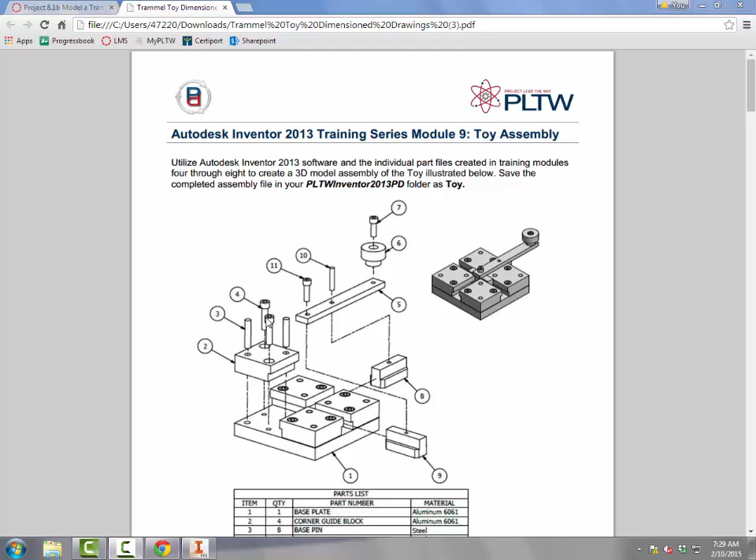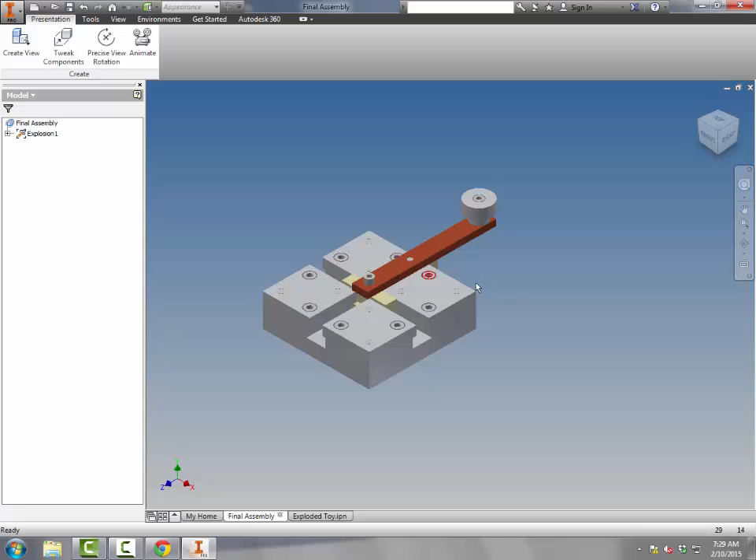In Inventor, I'm going to open a new IPN file, a presentation file. I'm going to click Create View and then select my final assembly. Again, we're doing manual explosions rather than automatic, and we will tweak the components individually on this drawing. So now this is on here, I'm going ahead and click on Tweak Components, and what I'm going to do is focus on maybe this corner block here along with the pins and screws that are in that corner block.

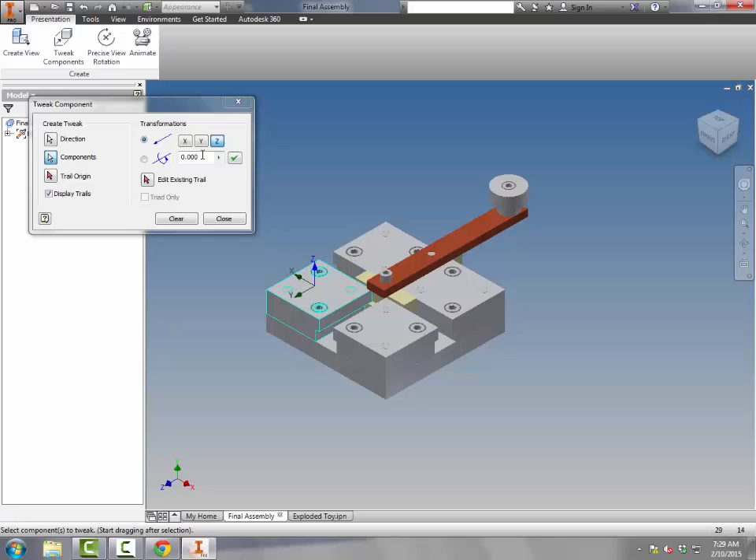So I'm clicking first click to set direction, which for us we're going to bring it up is going to be the Z direction. Now I'm going to select the components. Instead of doing just one at a time, I'm going to bring up the corner block along with the 4 pieces that are inside the holes. Let's try a distance of, let's say, 3 inches on this, and hit the check mark, and it's going to bring each of those up 3 inches. I'm happy with that. I can clear that out and start the process again.

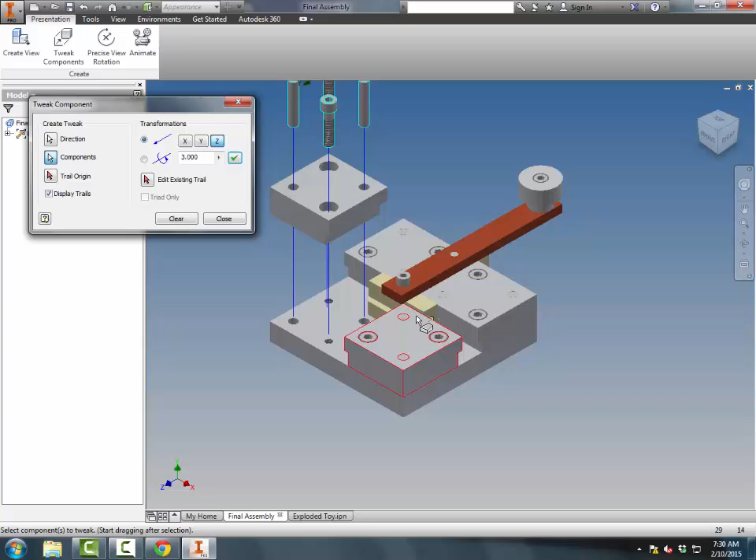Now I want to bring the actual pins and the screws out. Again, I'll try 3 inches as the distance. My check mark looks pretty good, right? We want to make sure that nothing is overlapping. I know these two are overlapping, which is okay. I could bring this one a little farther if I wanted to. This is looking pretty good. This piece is not overlapping any other pieces on here. So I'm going to hit clear.

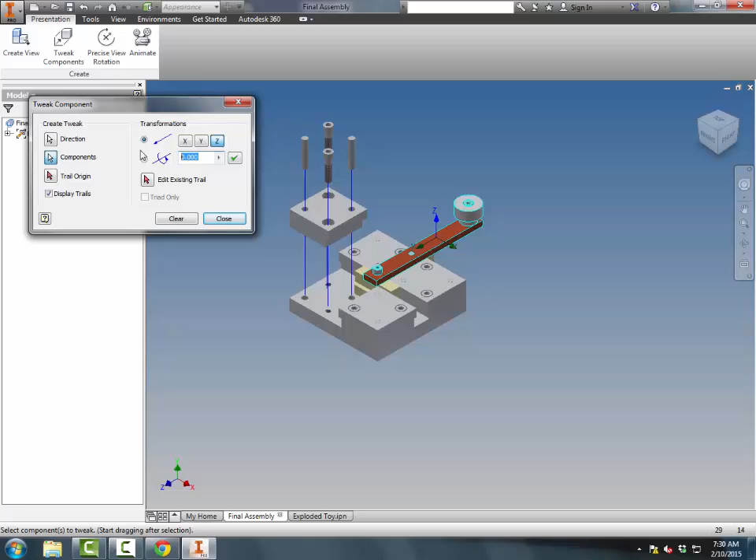Now I'm going to work on bringing out the arm, the knob, and some of the other pins and pieces over here. So again, first click is going to set my direction. Second click is going to set which components I'm going to use. So I'm going to do several at one time. Going to move in the Z direction, and the distance for that is going to be, let's try 3.5. Okay, looks pretty good. Clear that out.

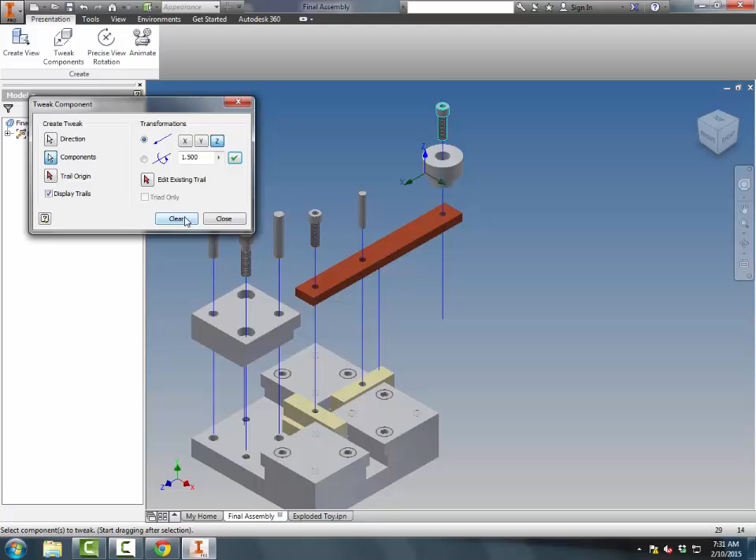I'm going to move these two. In the Z direction, I'm going to set the distance to, let's try 2. And then I'll move this last 2 out. Looks good. And then the last is this little piece on the inside here. Set a distance to 1.5. Looks good.

Last thing would be the 2 slide blocks. So first click to set direction, second click to select the component. Now I want to move in the X direction. In this case, it's going to be a negative number to move out. So I'll do negative 2.5. And then this one, this is going to be in the X direction. This will be positive. Select the component, set my distance.

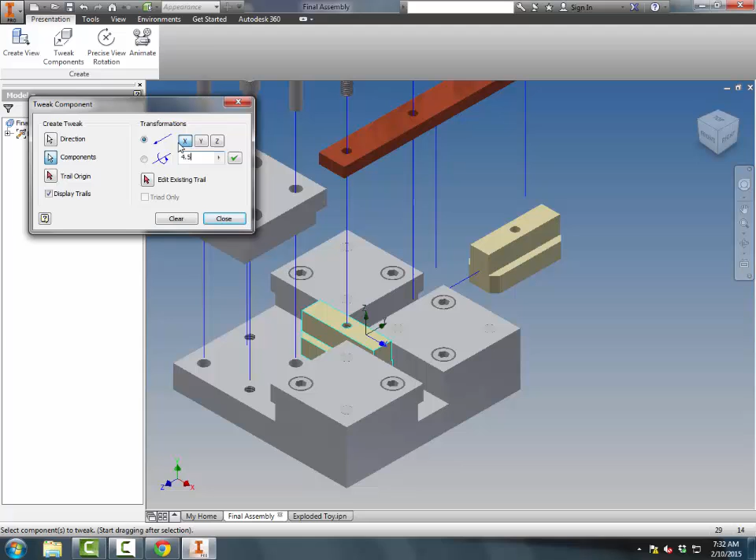Alright, so that's my exploded view. I'm going to save that, and then to finalize this project we're going to put together a drawing file.

So I'll start a new drawing file. Make sure that you're using IED title block. And we're going to enter the information here. First sheet will be the assembled toy. Put your name. Scale for this is probably going to be somewhere around 3/4 or a half, so you may have to go back and check that. This will be sheet number 1 of 2 sheets.

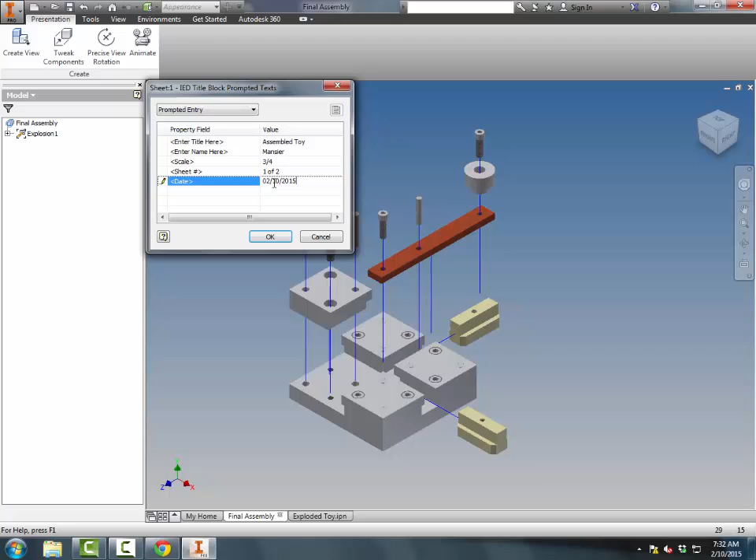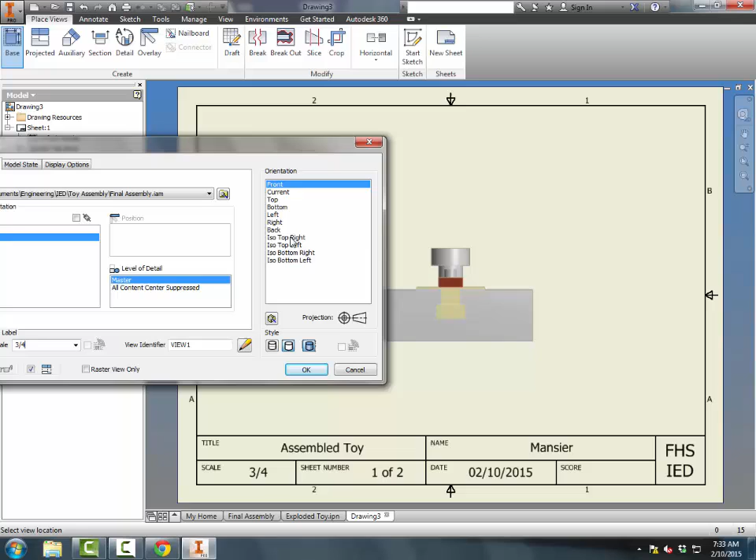We're going to need to do 2 sheets, and then today is the 10th. So make sure that we put this information on our title block. It's all populated here, which is great. I'm going to click on Base to add the assembly view to the drawing. So I'm finding the final assembly. Again, the scale is going to need to be reduced, so let's try 3/4 first. And I'll do ISO top right. This will be basically my home view in the assembly drawing.

This looks pretty good. I'm going to justify this to the top and to the left. Left click to place it, and then right click to hit OK, since I'm just placing this view. So that's the top, front, and right of my object.

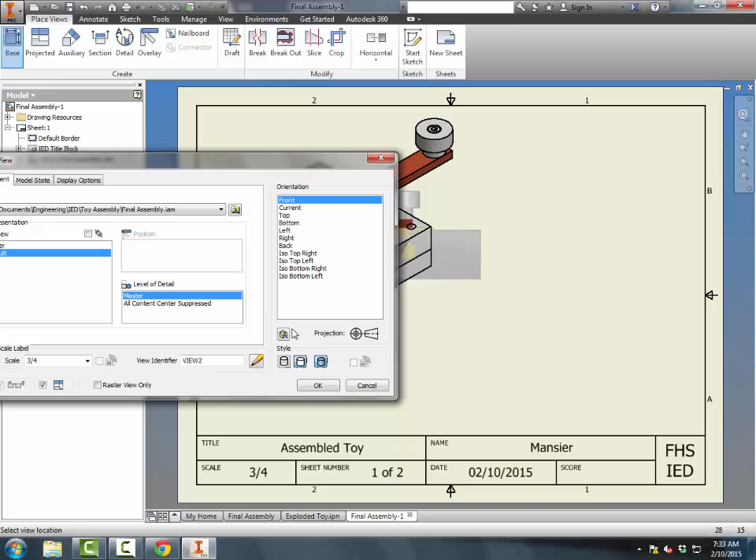I'll do the process again to get the back, the bottom, and the left. Sometimes when you click on this, it's only giving you the assembly file. I need to make sure the file types include all Inventor files if I'm looking for something other than the assembly. In this case, I'm looking for the final assembly again. I'm not going to be able to get the back, bottom, left by any of the orientations currently here, so I'm going to select Change View Orientation.

My home button is what my current view is, which gives me the top, the front, and the right, and I want the back, bottom, left. So if I click on this back corner of my cube, and then the bottom, I get back, bottom, left, which is what I want. Finish Custom View.

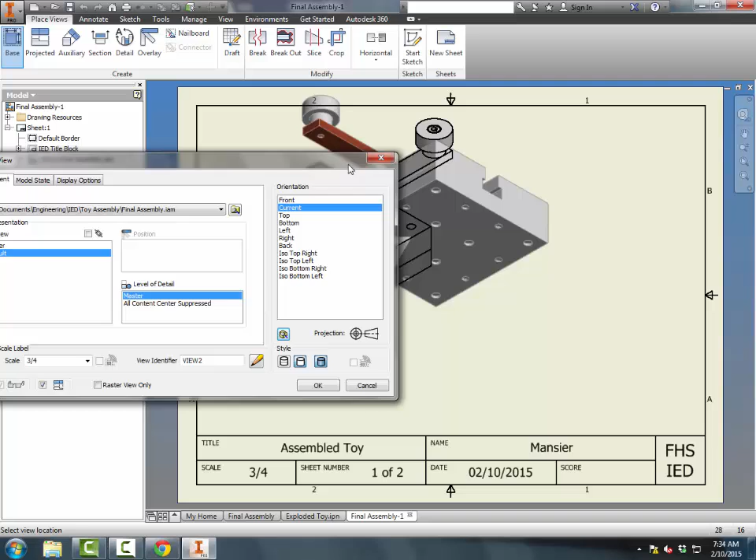And then I'll bring this on the sheet as well. Left click to place it, right click to hit OK. So that's it for the first sheet. I'll create a second sheet. This will be for the exploded toy.

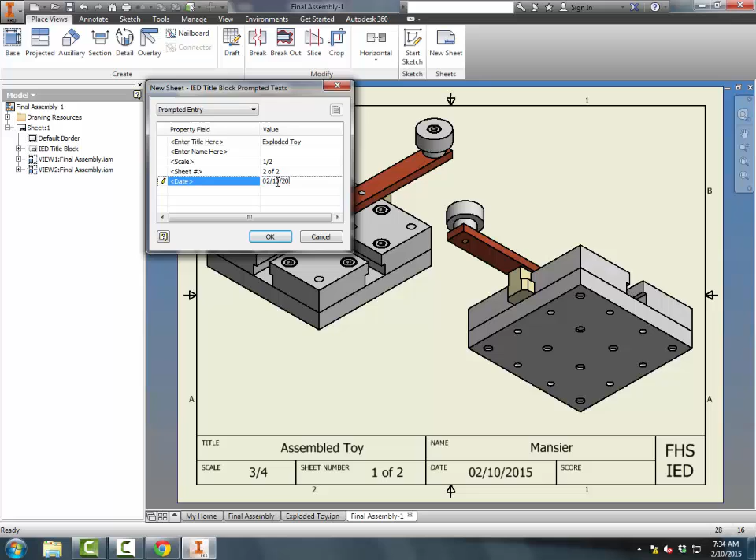Fill in the same information. In this case, I think the scale is going to be 1/2. This is going to be sheet 2 of 2, and then again today's date. Click base to place my exploded view.

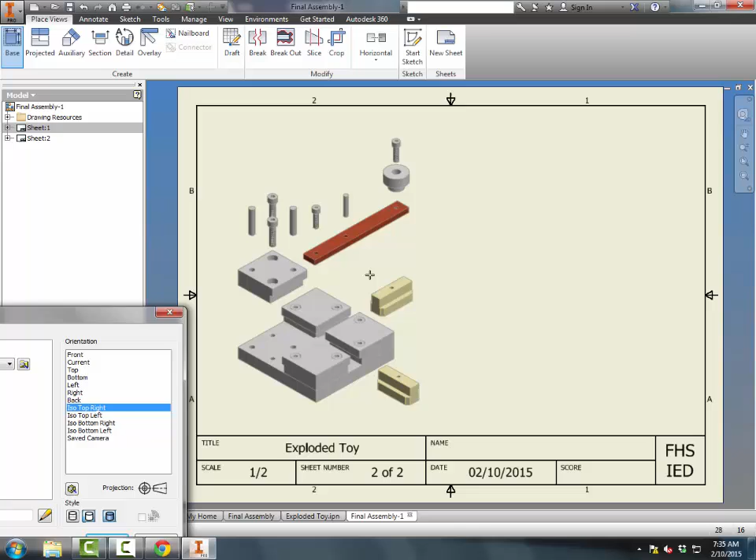I want the ISO top right, which is my home view. Scale in this case is probably going to be at like 1/2. Seems to fit pretty well. Justify this to the left side so that I have room for my parts list and my balloons. Left click to place it, right click to hit OK.

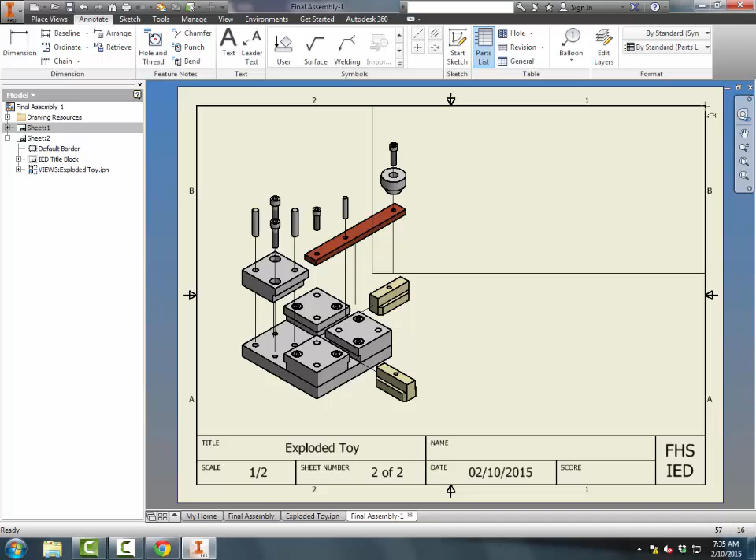I go to the Annotate tab to get my parts list and balloons. I'll start with the parts list. Parts list is going to be based on my exploded view, so I want to select that. And I like to snap it to the title block. You can actually feel it snap on the mouse to the title block and justify it to the right hand side. Now it's overlapping, but we can clean this up so that's no longer doing that.

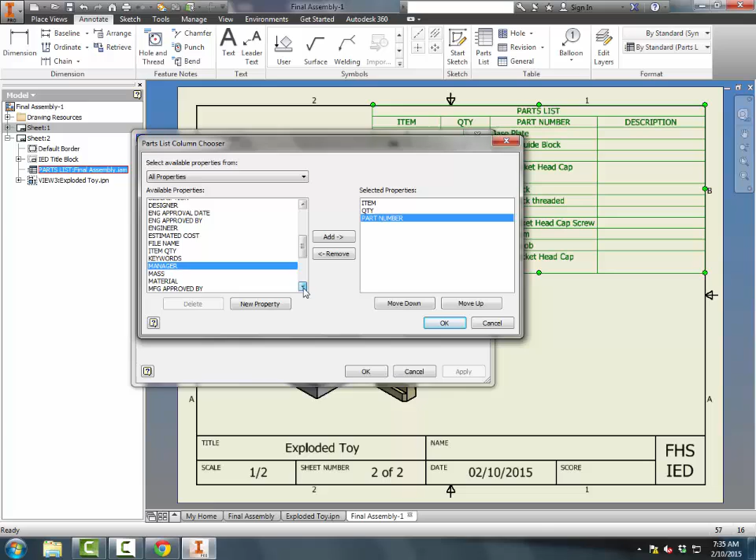Let's get rid of the description because the description is blank, and maybe add material here just like we have on the original PDF file. So if I double click this, I'm going to go into the first option, which is column chooser. I'm going to remove the description, go down into the M's, and add material.

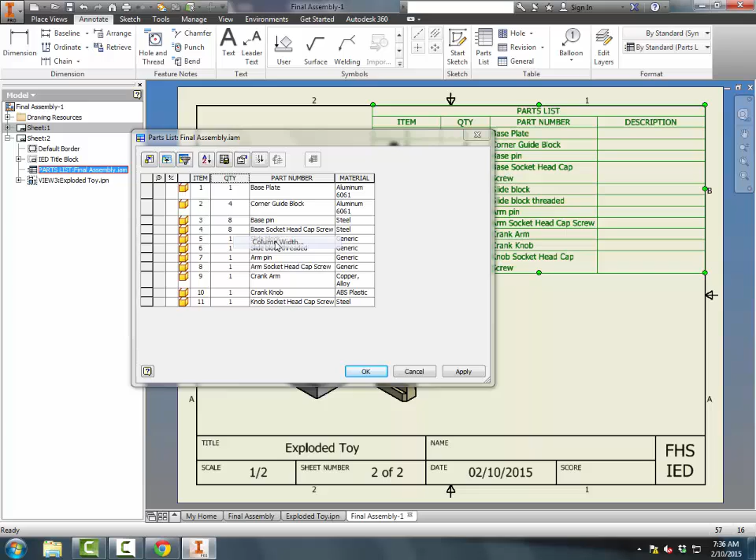A couple other things that we can do. If we want to change the size of, let's say, how wide the column is for item, we can do that in here just like we would in Excel. If I right click on this, I can do column width. Let's do maybe 1/2 inch for this first one, 1/2 inch for the second one, 2.5, and maybe 1.5.

Hit apply and OK. Get nice, clean, organized here. I have the item quantity, part number, and the material. Last step then is to add the balloons. I want to identify each of the 11 unique parts on here.

We don't necessarily need to show all of the pieces with a balloon, right? Because there are 8 of these base pins. We don't need to have a balloon on all 8 of them. If I just identify one, that would be sufficient for this drawing. Okay, same with these. There's 8 of these, but I only need to identify one with the balloon. So I want to add all 11 balloons on this.

I'll save this drawing file, but before I submit it, I want to create a PDF out of it. So I'll save this, final assembly, whatever you want to call it. And then I'm going to create a PDF. So I go to File, Save As, Save Copy As.

I'm going to change the file extension to PDF. I want to make sure that I go into Options and include all sheets. Otherwise, it'll just make a PDF of the current sheet that you're on. Hit OK, and then save the PDF.

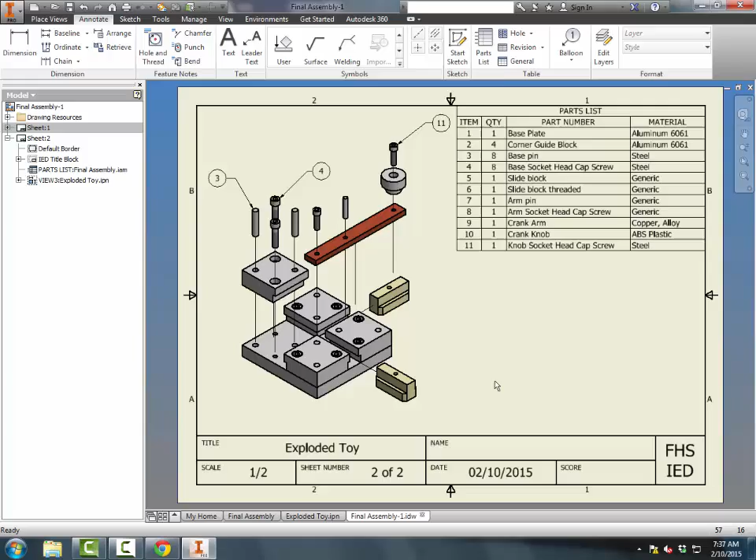Once this pops up, I would encourage you to look at it. Make sure that both sheets are in the same file, which is what we want. And then you can upload this on the LMS under 8.1b, which is where we'll turn this in. And you'll get feedback on the drawings based on the rubric here.